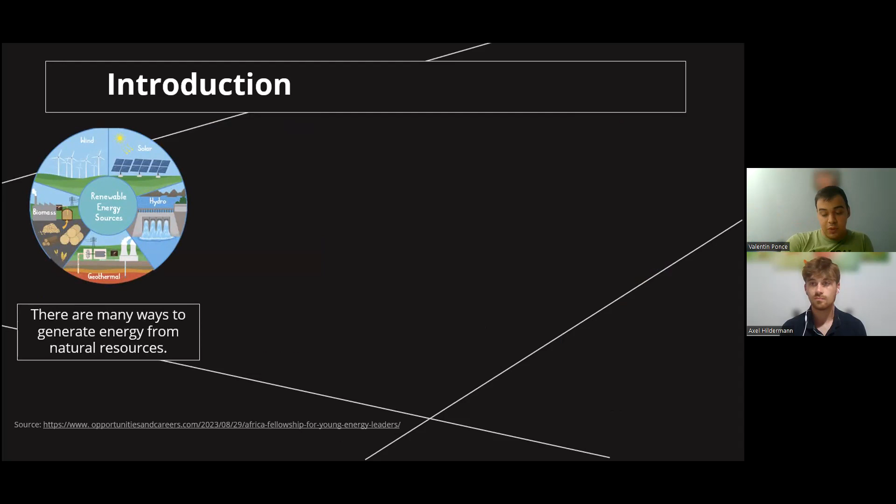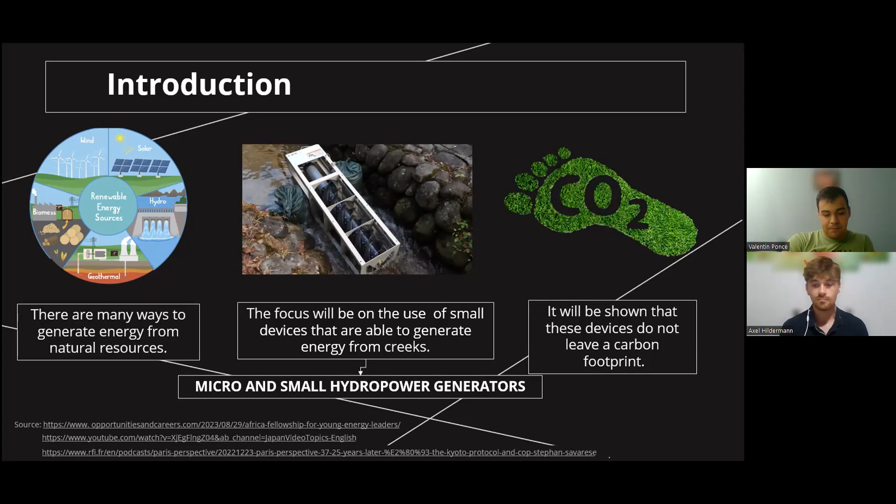In this research, we will focus on generating electricity from creeks or rivers, more precisely by micro and small hydropower generators, which have little carbon footprint. Now, my partner Axel is going to explain how we are going to develop the presentation.

Thank you, Valentin. Well, now I am going to show the map of the presentation. First, we are going to present the problem and describe the context of this problematic situation, to then talk about the causes and the consequences of the lack of energy in remote areas.

Secondly, we are going to present the solution. And then we talk about the micro hydropower generators and characteristics of these devices. Finally, the benefits of the use of micro hydropower devices will be presented. So now it is so important to explain the impact of the paper.

For us, it is so important to show the energy problems in isolated places and the quality of life of people who do not have access to the electric service. Also, this paper aims to explain sustainable solutions to the lack of energy and provides the knowledge necessary to contribute to the environment. So now my partner, Valentin Ponce, is going to describe the problem.

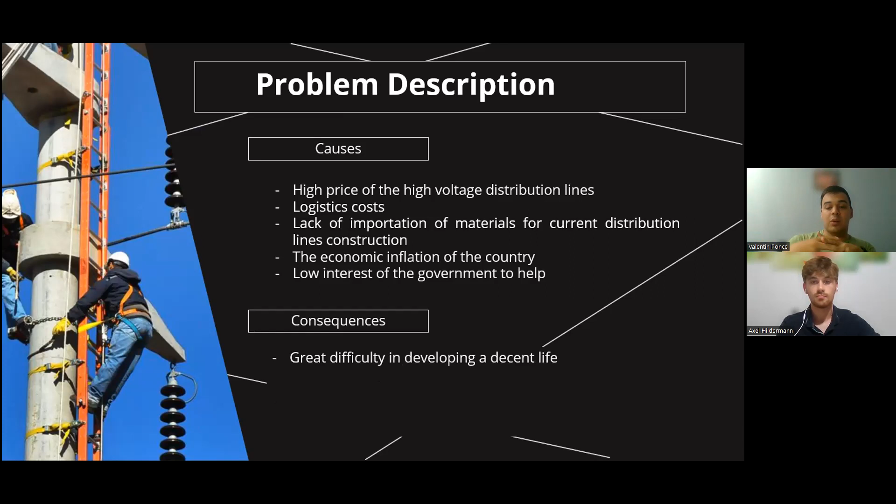For example, a great difficulty in developing a decent life, or generation of pollution to the environment due to the use of alternative energy, causing, for example, deforestation, or polluting smoke due to high use of fuel. Now, my partner Axel will show how this problem can be solved.

Thank you. So now let's present the problem approach. In order to address the lack of energy in isolated places, we propose the implementation of micro hydropower generators. But what is a hydropower generator? It is the way to generate energy from the flow of water. And why the prefix micro? There is a classification that depends on the amount of energy generated by each device.

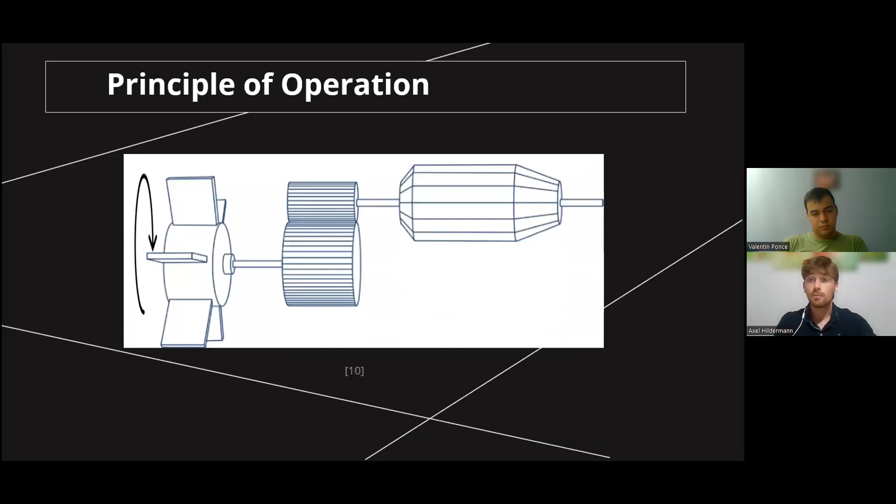So a hydropower generator is composed of three main components: the turbine, which has blades, a transmission mechanism such as a gearbox, and a generator that is composed of a magnet and a coil of wires. The transmission mechanism has the task of creating the correct speed relation between the turbine and the generator.

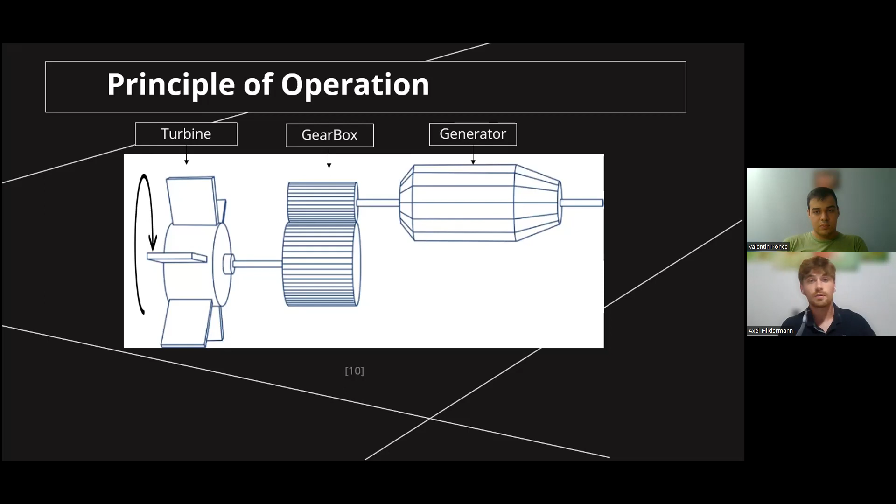Now imagine a river with flowing water. Some of this water is diverted to create a controlled flow. This controlled flow hits the blades of the turbine, and the turbine spins. This rotational movement is transmitted to the generator by the gearbox in this case. So in the generator, the magnet spins due to the spinning turbine, and electric current is created in the coil of wire.

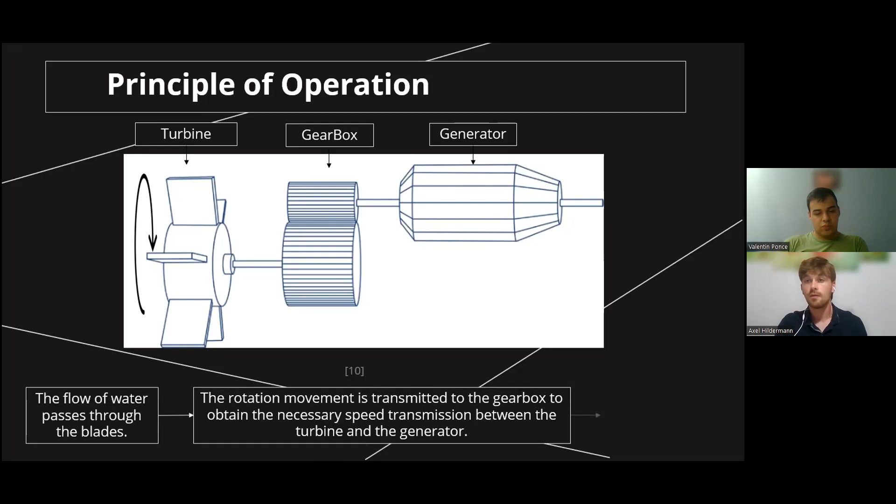There is electricity. So, in summary, the flow of water passes through the blades. At the same time, the rotation movement is transmitted to the gearbox to obtain the necessary speed transmission between the turbine and the generator. Finally, the generator creates electric power. So now my partner, Valentin Ponce, is going to show three very interesting types of micro hydropower generators.

Thank you, Axel. Previously, Axel described in detail how an electric power generator works. I must clarify, all generators work with the same principle of operation. The only change is the shape or arrangement of the turbine. Now, I am going to present three types of generators.

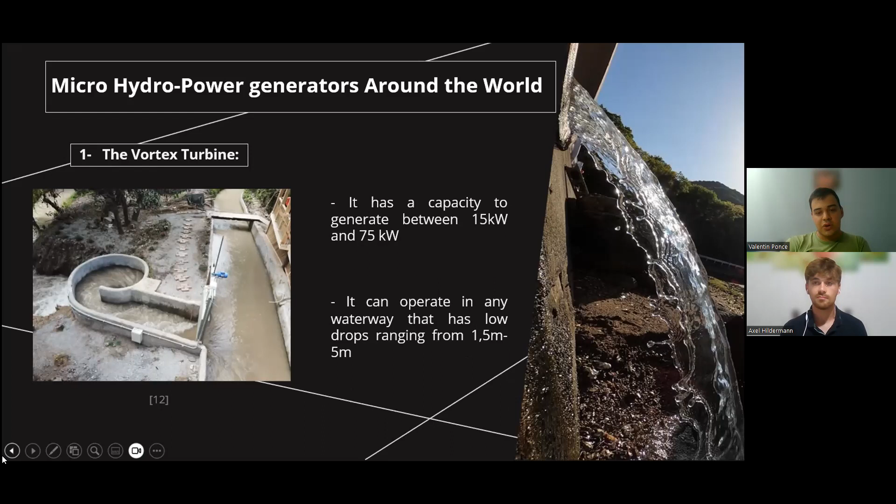The first is the vortex turbine. It works with the vortex funnel. It can generate between 15 and 75 kilowatts, and it can operate in any waterway that has a low drop ranging between 1.5 and 5 meters.

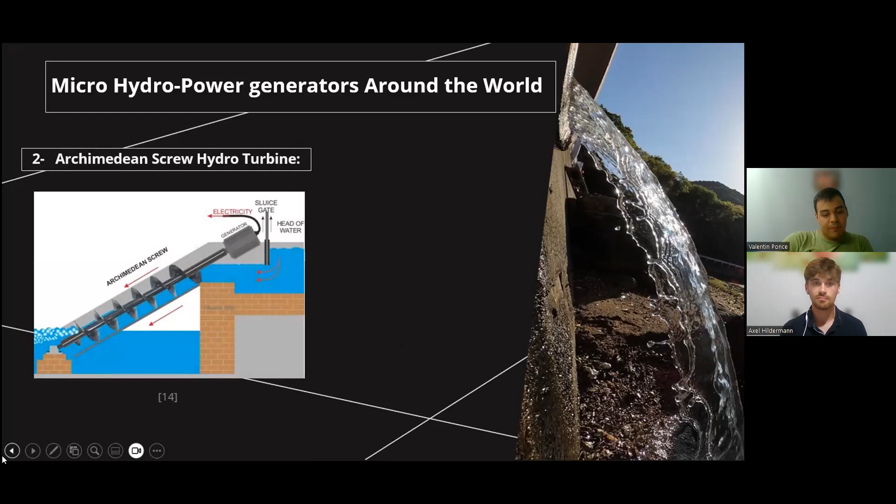The second is the Archimedean screw hydro turbine. It is characterized by having a screw in the turbine. It has a capacity to generate between 5 and 500 kilowatts, and it has a useful life of 30 years.

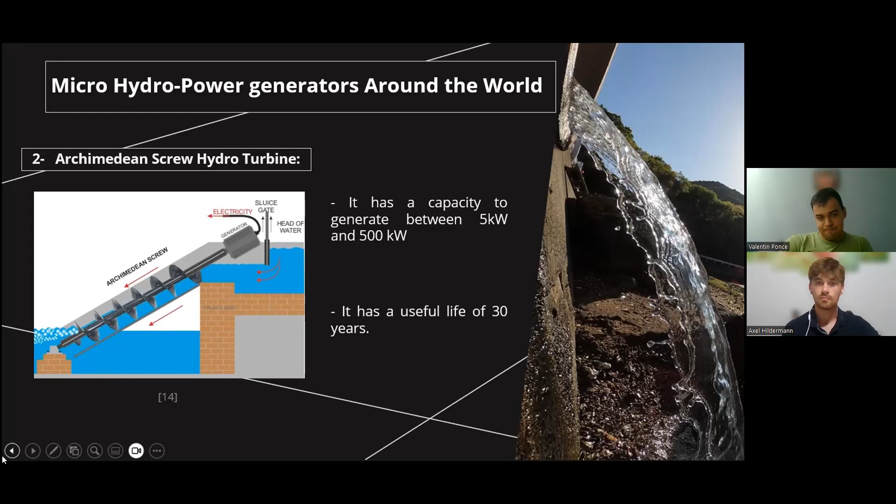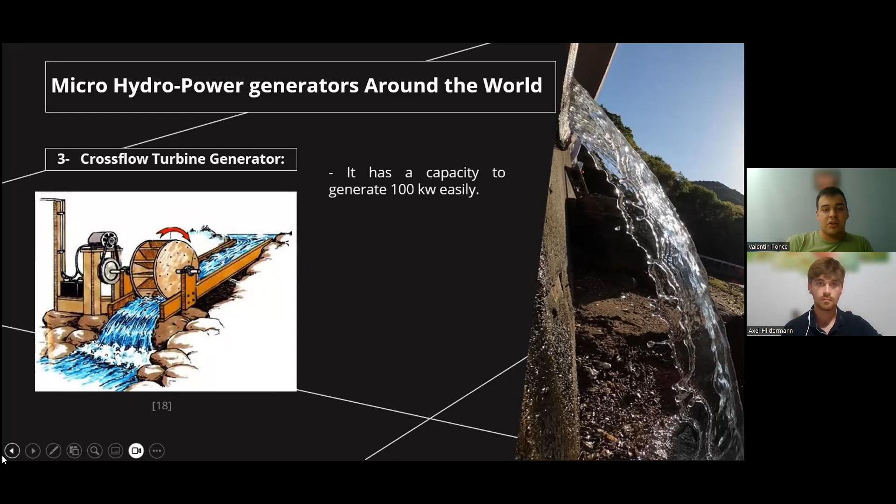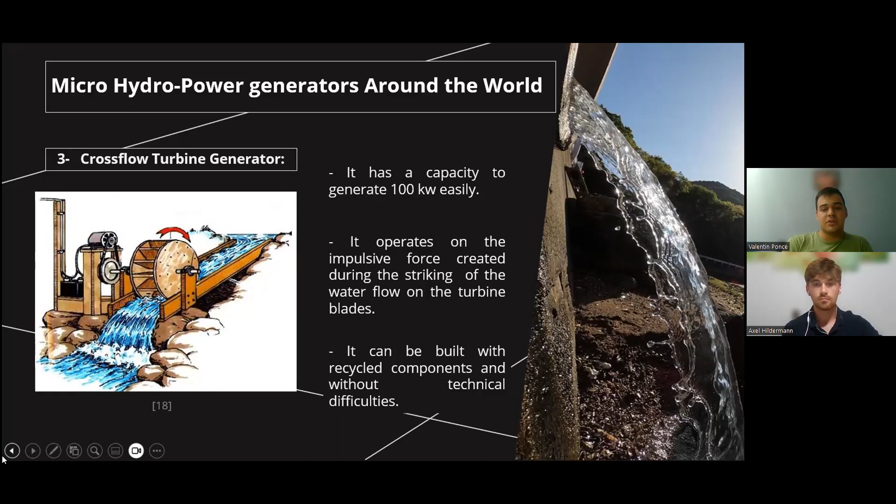Finally, I present the cross-flow turbine generators. It can generate 100 kilowatts. It operates on the impulse force created during the striking of the water flow on the turbine blades, and can be built with recycled components and without technical difficulties. Now, my partner Axel will present the advantages and disadvantages of these devices.

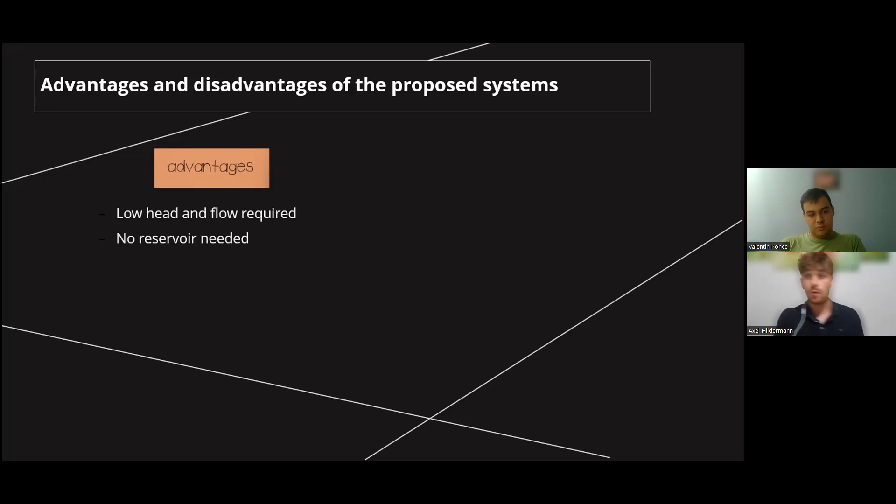Thank you, Valentin. As my partner said, I am going to show some advantages and disadvantages of the micro hydropower generators. These devices have many advantages, but the main advantages are, for example, low head and flow required. In other words, these devices can be installed in small rivers or in flows of water with small drops. Another advantage is that these devices do not need a reservoir of water. For example, a large hydropower generator needs a reservoir of water to operate, for example, a dam.

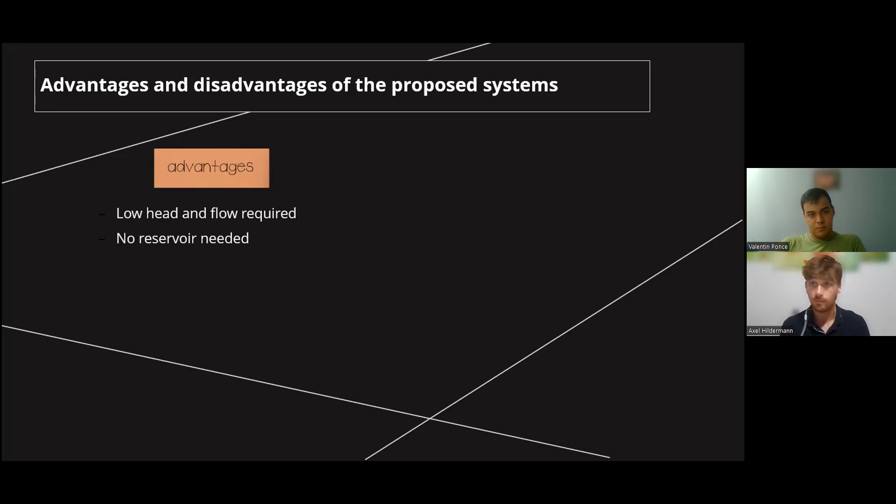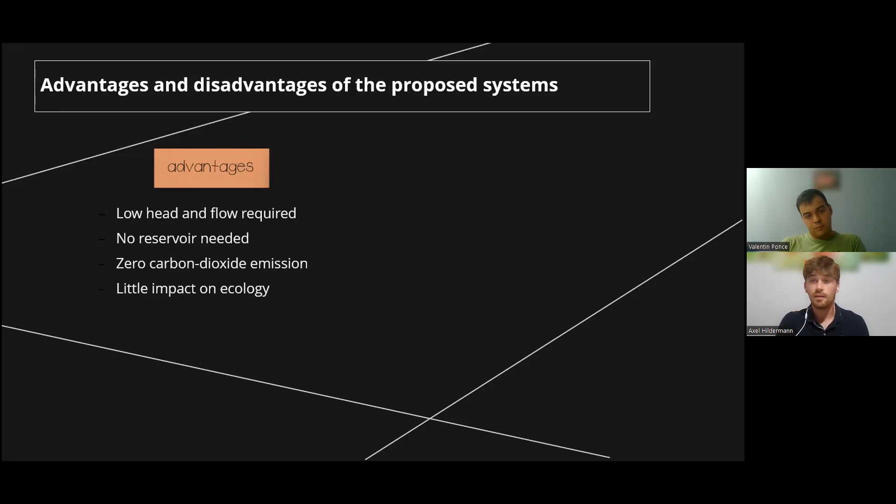Other advantages are related to the environment. The micro hydropower generators do not create a CO2 footprint, and the impact of these devices on the environment is very small. Other advantages are the high efficiency of these devices, which reaches 70%, the continuous and reliable operation, and the comparatively low cost compared with solar panels, for example. These advantages are very interesting, and, sorry, these are the advantages of these devices.

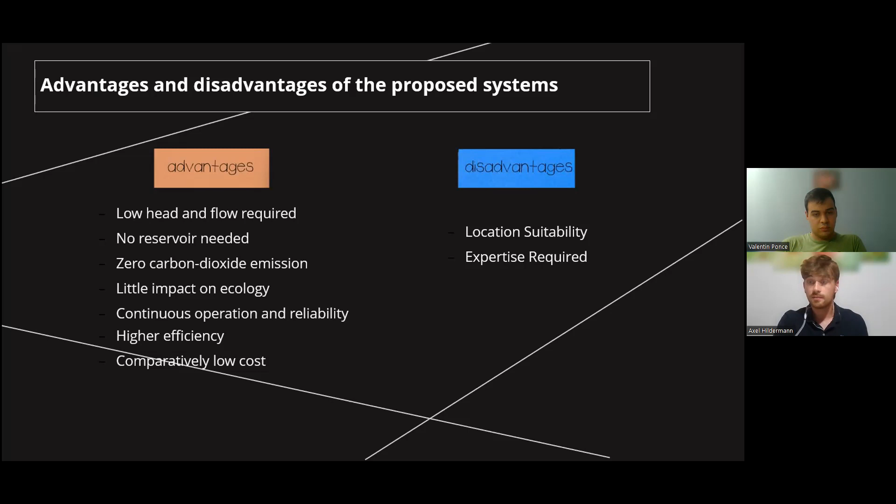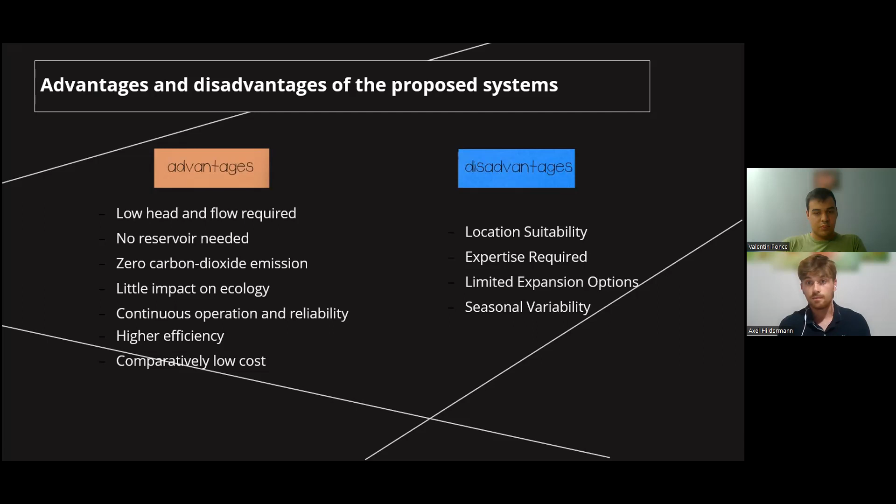In order to finish this presentation, I am going to give a conclusion. As electromechanical engineering students, we are sure that the implementation of micro hydropower generators is a great way to solve the lack of energy in isolated areas. And we believe that it is very important to spread this technology and all types of sustainable devices to the world.

It is clear that the devices presented here can solve many energy problems. And it is very, very important to understand that it is not necessary to have an energy problem to use these devices, because these devices have the capacity to reduce the carbon footprint. So this presentation has finished.